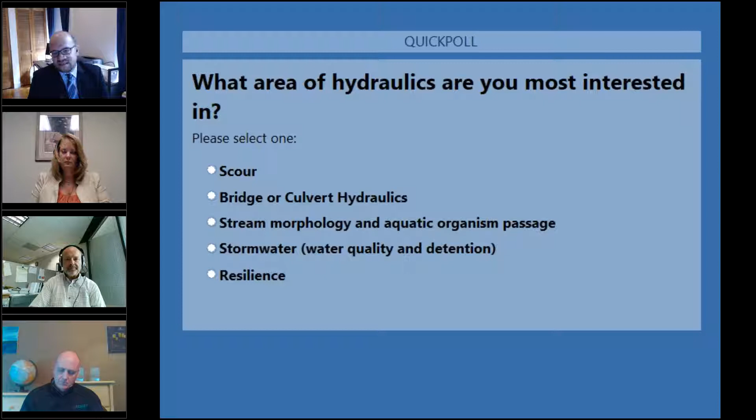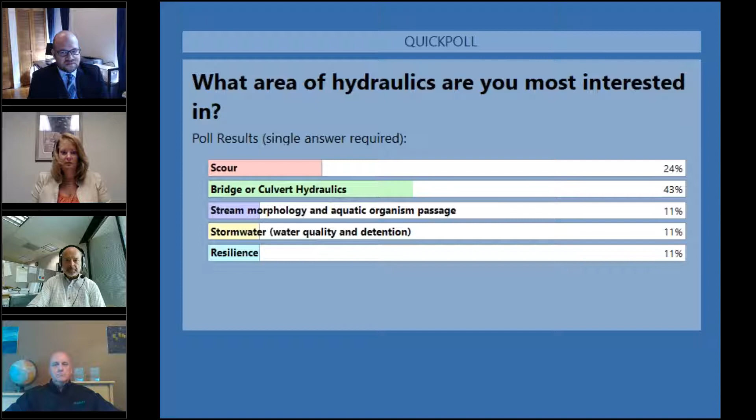Results. Wow, lots of bridge and culvert hydraulics. Yep, 24% scour and then 11% for all the other categories. Okay, I'm going to hide that poll question.

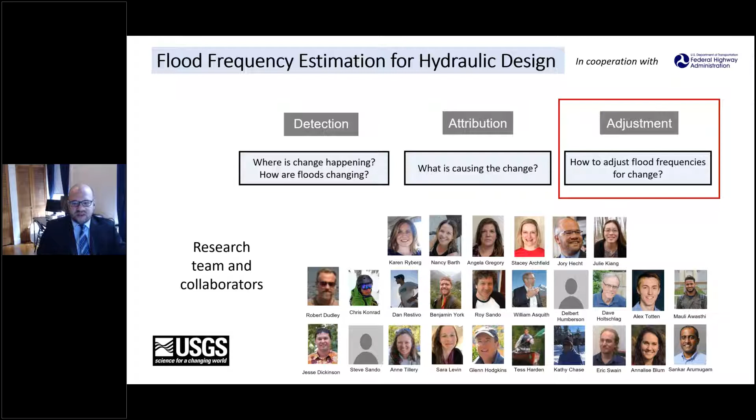So I'd just like to start with a brief overview of my presentation today. First, I'm going to review some more common approaches for adjusting design peak flows, such as the 100-year flood, for changing environmental conditions. Next, I'm going to use a case study in suburban Detroit to illustrate the importance of accounting for changes in peak flow variability. After that, I'm going to show how accounting for environmental changes can get a bit messy when it comes to selecting a design flood estimate that takes environmental changes into account.

Now, while urbanization can indeed induce many different changes to peak flows through a multitude of mechanisms, here we're going to focus on the better known tendency for increases in impervious cover to increase peak flows. And then finally, I will conclude with a brief discussion of how these methods can be extended with some extra steps and cautions to make climate-based adjustments for those who are interested in incorporating any climatic changes into their estimates.

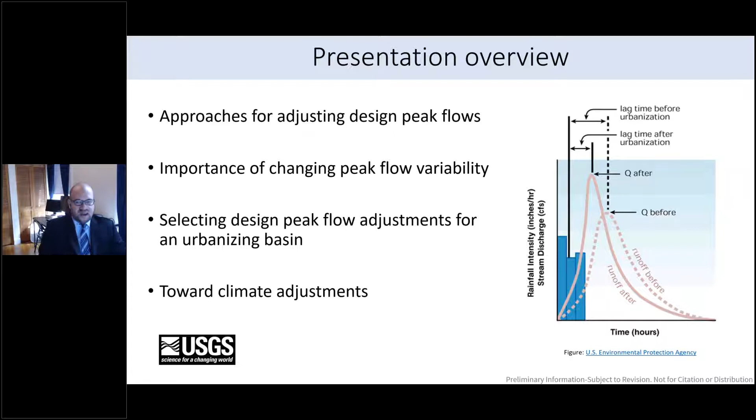So let's get into some existing practices for addressing changes in design floods. So one approach that's sometimes used is simply a safety factor. For instance, this might be requiring a certain freeboard height for a structure above the 100-year flood elevation. Another common practice is to adjust previously computed design floods using updated hydrometeorological data. This may include using the most recent USGS flow data or using updated extreme precipitation estimates from NOAA's Atlas 14 in a design storm simulation, or it might even include removing data from an unrepresentative period.

So if you, say, have a dam that was built in 1960, it might not be worth including the data prior to 1960. Another approach is to simulate the effects of different historical or design storms on a watershed under current land use conditions. In addition, there are numerous, actually quite a few, statistical procedures for adjusting design events using trend modeling.

More recently, the National Cooperative Highway Research Program commissioned a report that looked at a whole bunch of different methods from the literature and recommended using just trends in the mean annual flood. Now, one important thing to bear in mind about such an approach is that it assumes that small annual peak flows are increasing at the same rate as large ones.

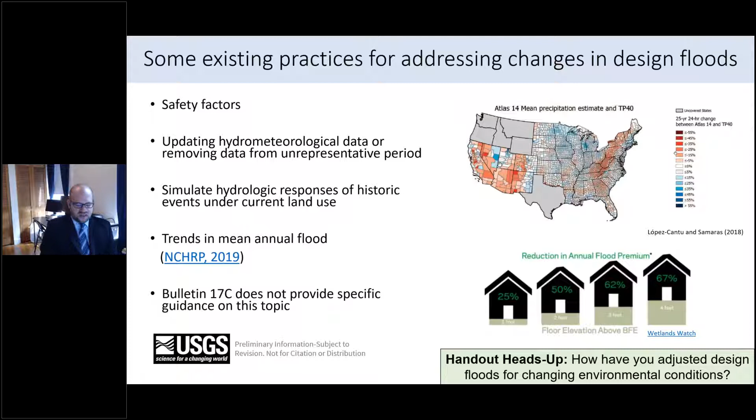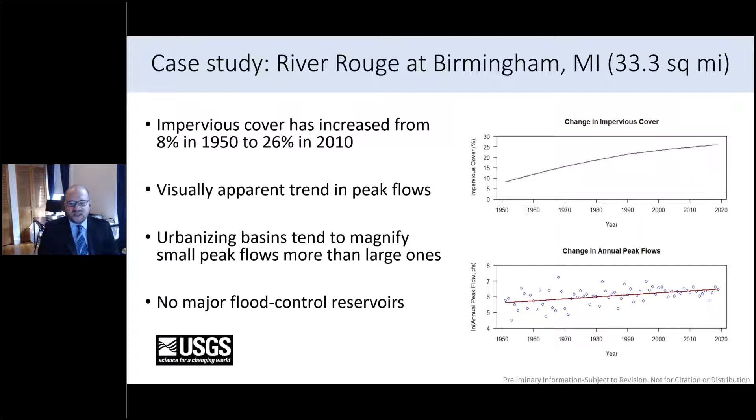So one thing that we sought to do is directly use this impervious cover information in a trend model instead of using time as a surrogate for it. So how can we go about doing this? Well, we can apply the same natural log transformation that you saw on the previous slide, but instead of using time as our independent variable, we use the impervious cover, which we've denoted here as IC, as an independent variable. And we get a similar result.

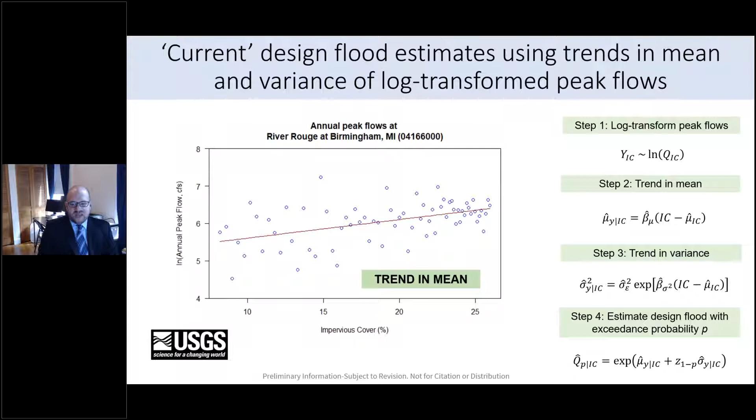One slight difference that you might see is that the points representing the latter part of the record are closer together because, as we saw on the previous slide, the urban growth rate has slowed down considerably in recent decades. However, one of the key features, the reduction in peak flow variability over time, remains when we look at the basin's response to changes in impervious cover. You can see that the distance between the red trend line and the blue observations becomes smaller as the watershed becomes more urbanized.

So to model the trend in variance, we can square the model residuals and see whether or not they are also related to the impervious cover. They are. So we can also model the change in variance as a function of impervious cover. Then we add the estimates of the mean and variance conditional upon a given value of impervious cover, say the impervious cover in our most recent year of record, into the quantile function.

So we take the mean of the log-transformed flows conditional upon the impervious cover and the variance of the transformed flows conditional upon current impervious cover, and we plug them into a quantile function that allows us to estimate the design flood with an exceedance probability P. So if we're looking at a 100-year flood, the exceedance probability will be 0.01. And this is how we can incorporate changes in impervious cover into design flood estimates.

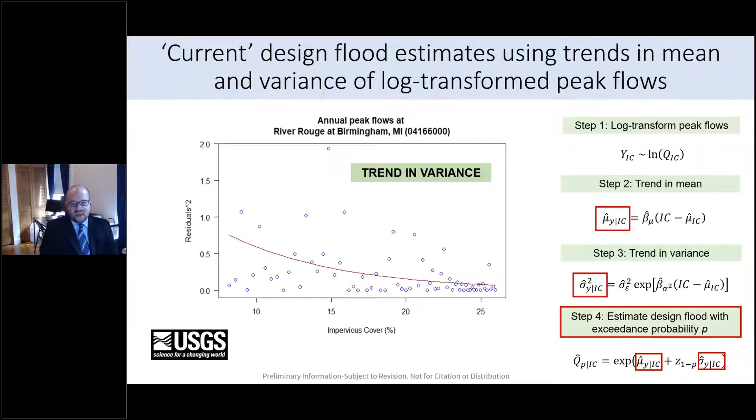So, however, we're not going to assume that models that look at trends in the mean and variance are always better, because any time you add more complexity to a model, you also increase the uncertainty. So I'm going to show you how we went about comparing 4 of the different trend models that we're examining in this study for our site in suburban Detroit.

So first, we're considering a no trend baseline case. Then we're considering a case when there's only a trend in the mean of the log transform flows. Then third, we're considering a case where there's a trend in both the mean and the variance. And then finally, in addition to looking at changes in the mean and variance, we're just going to go right to the percentile that we care about, which is the 100-year flood, or the 99th percentile of annual peak flows.

And you can do this with a method called quantile regression, which doesn't even depend on selecting a probability distribution. And one thing that's nice about it is that it can recognize that different floods with different recurrence intervals change at different rates. So here you see a little conceptual diagram. The 2-year flood increases pretty rapidly, the 10-year flood a little less rapidly, and the 100-year flood barely increases at all. So we wanted to compare this method to more traditional approaches that involve probability distributions.

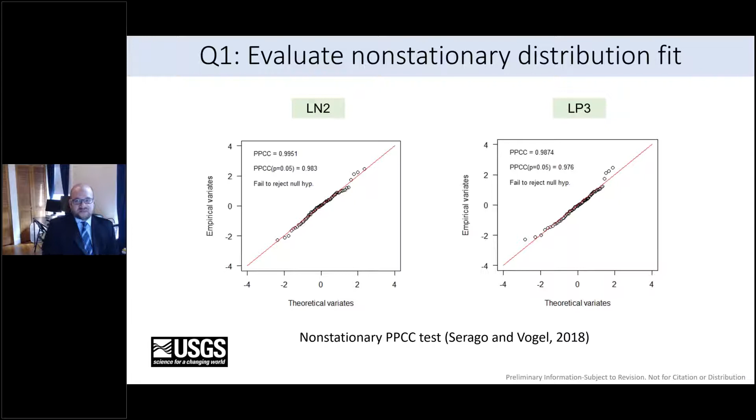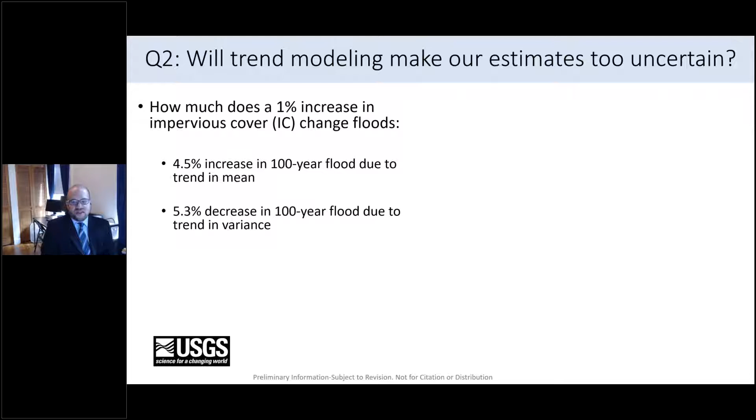So now moving on to our second question, will trend modeling make our estimates too uncertain? Or when is it worth dealing with the extra complexity of trend modeling? So to answer our second question, we first need to compute the trends in the mean and variance. Our models of the trends in the mean and variance show that for each 1% increase in impervious cover, there is a 4.5% increase in the 100-year flood due to the trend in the mean, and a 5.3% decrease in the 100-year flood due to the trend in the variance.

And then we can run Monte Carlo simulation experiments to see whether it's better to use a model with higher bias and lower uncertainty. So that would be a case where you just assume no change and you might have more bias, but you're going to have less uncertainty because you have fewer parameters. Or a model with lower bias and higher uncertainty. And we would do this for data arising from an assumed probability distribution.

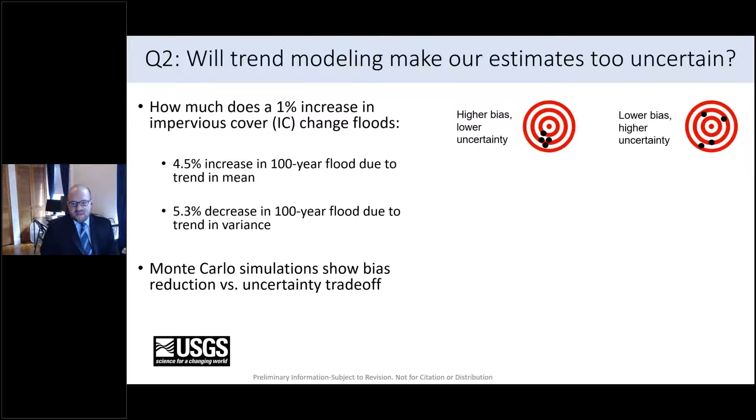And then to determine whether to use an estimator that has higher bias and lower uncertainty, or lower bias and higher uncertainty, we use the fractional root mean squared error metric, which accounts for both bias and uncertainty. And we run these experiments for many different combinations of trends.

So we look at trends in the mean and trends in the variance, and look at a whole bunch of different combinations, which you see there with the black dots. And we see for each combination which of these four models performs the best, or in other words, has the lowest fractional root mean squared error.

So let's start with a simple example. If we have no trend in the mean and no trend in the variance, not surprisingly, the simulations tell us that it's better to use the model with no trends, because otherwise we're just going to add uncertainty without really reducing the bias much.

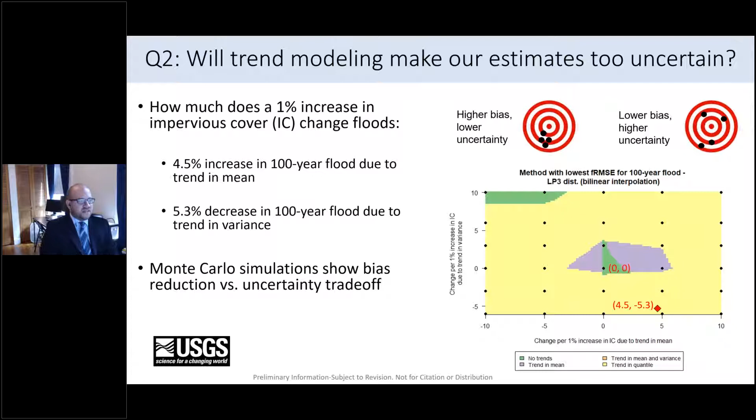So this provides us with important information about how well these different methods might perform under different distributional assumptions, but it's not the only line of evidence that we're going to use to make the final judgment. So now let's look at the actual 100-year flood estimates. These 100-year flood estimates are conditioned on the watershed's current impervious cover, approximately 26%.

Again, modeling just a trend in the mean assumes that the variability of the annual peak flows is the same over the entire period of record. Clearly, this is not the case. Moreover, the 100-year flood estimate accounting for just the trend in the mean, as you see in the purple bar on the bar plot, is way above the flood of record. And this is a 69-year record for your reference.

As you can see in the graph on the left, there isn't any strong visual evidence that the largest floods are increasing. For this reason, we discard the trend in the mean as an option under both the LN2 and LP3 distributional assumptions.

Next, let's look at quantile regression. Again, this is an empirical method that we're comparing to distribution-based fits, and therefore yields the exact same result in both the LN2 and LP3 graphs. So it's the exact same in both bar plots. However, it is substantially below the flood of record on both graphs.

Now, while the flood of record in theory can have a recurrence interval above 100 years, there is another important issue with quantile regression. The largest flood took place earlier on in the urbanization process. So as a result, the quantile regression model estimates a decrease in the 100-year flood. For this reason, we eliminated quantile regression from further consideration.

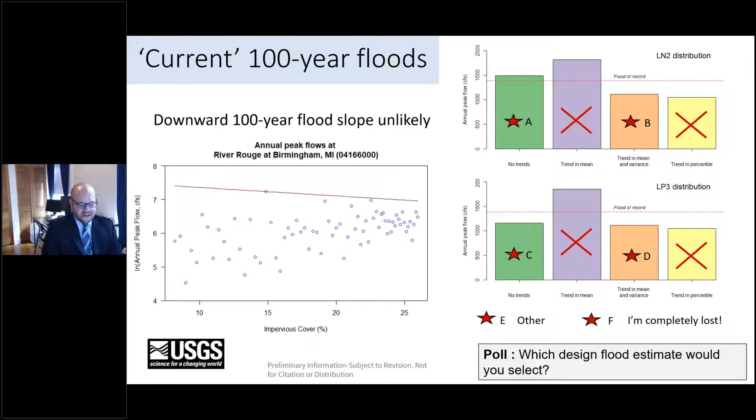Okay. So now moving on, some of you might have been wondering if it's possible to apply the same method using climate covariates such as annual precipitation or seasonal temperatures instead of using urbanization indicators such as impervious cover. And the short answer is that yes, you can extend this approach to accommodate climatic variables, but you need to be very careful.

First, you need to make a judgment as to whether the trajectory of change is going to continue, level off, or switch directions over the course of the design life of your infrastructure. This can get tricky with climatic data since apparent trends may be really short-term changes in longer-term cycles. It's best to use design floods updated for current conditions to design infrastructure for a lifetime over which subsequent changes are unlikely, or else you would have to make this even more complicated.

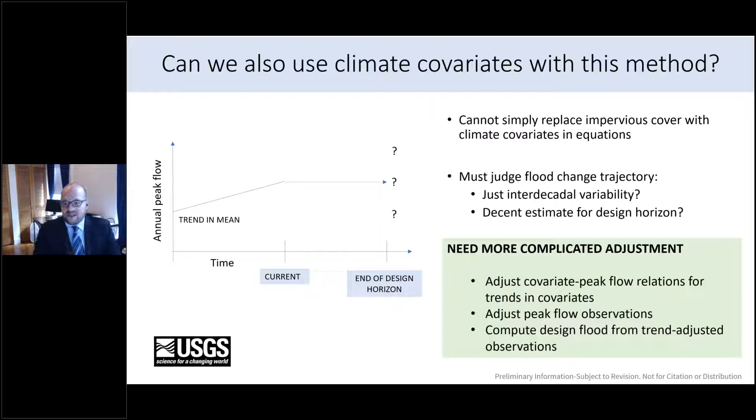So don't go home and try what I showed you with urbanization adjustments on climate adjustments just yet, but we will have a paper or report that will publish this work. So to sum things up, I'd just like to add a few concluding remarks.

First, methods that account for changes are essential for design peak flows. Second, changes in peak flow variability can affect design flood substantially, especially in urbanizing basins. My prior dissertation research shows this effect in numerous other basins across the country. So if you're wondering whether the River Rouge case study is a special case, you're not going to see it everywhere, but there are quite a few other basins in which we see this effect.

However, urban basins can also be quite idiosyncratic since there are so many other things going on in addition to impervious cover. And what I'd like to look at in future work is the effects that stormwater infrastructure construction may have on the reduction of peak flows.

Third, it's also possible to make changes for climate adjustments, but these are more difficult and complicated. For instance, you need to consider whether apparent trends have sustained change signals, and if so, make adjustments for temporal trends in your climate covariates. And if I wasn't clear before, climate covariates are the independent variables that you use in the regression models to adjust design peak flows. And I'm happy to answer more questions about this or talk to anyone who's interested in the topic more offline.

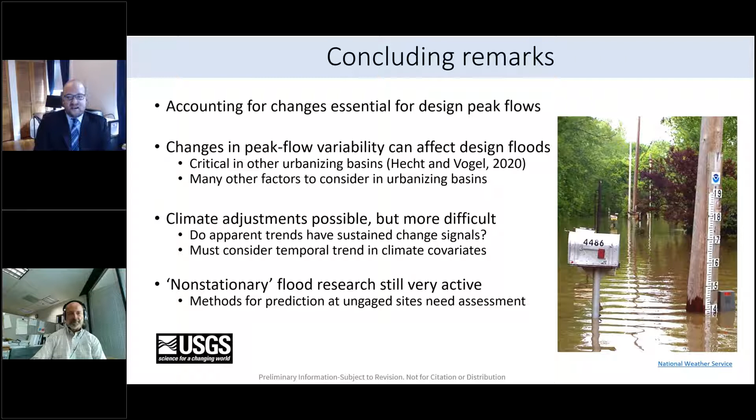However, our immediate next step will take a bigger picture view of changes in flooding and their impacts on infrastructure. As many of you indicated in the initial poll, there's a strong interest in bridge scour in the transportation community. And with that information, I'd like to make a shameless plug and say that we'll be investigating additional streamflow metrics and hydrologic forcing factors to help the Federal Highways Administration understand channel change and bridge scour.

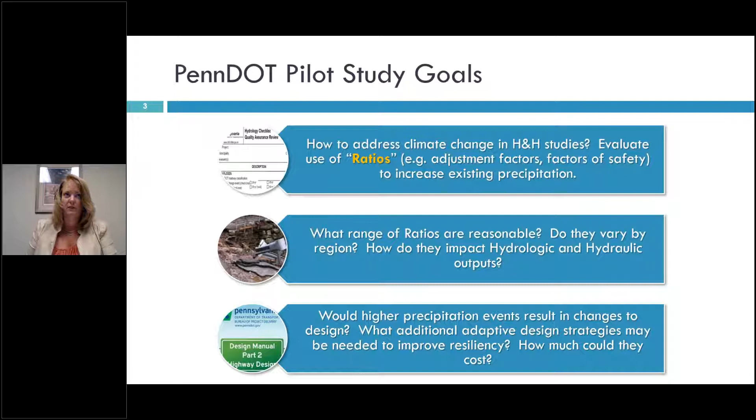Pennsylvania has a lot of varying topography and climate across the state, and that's why we looked at 3 different parts of the state for this study. And then would the higher precipitation events result in changes to the design? What adaptive design strategies might we want to consider to improve resiliency, and how much would they cost? Given that it's 20 minutes, I'm not going to get into a lot on the cost considerations. We do have a pretty in-depth report that was developed for Federal Highway that does get into some of those details too.

For the 3 sites that we looked at, we used the Watershed Modeling System, WMS, to develop the basin characteristics, and then the peak flows for the existing and future hydrologic conditions were developed using HEC-HMS. And we considered future land use in the watersheds where that was applicable or where there was anticipated future land use.

I can hear a lot of background talking. Is that? I can too, but it looks like it's coming from, is that not going on in your area? No, there's nobody in my office but me physically. Well, that's interesting. Hopefully it's going to calm down here. I'll keep checking the system to see if I can figure out where it's coming from. Okay, I didn't know. I was like, no, I'm the only one here.

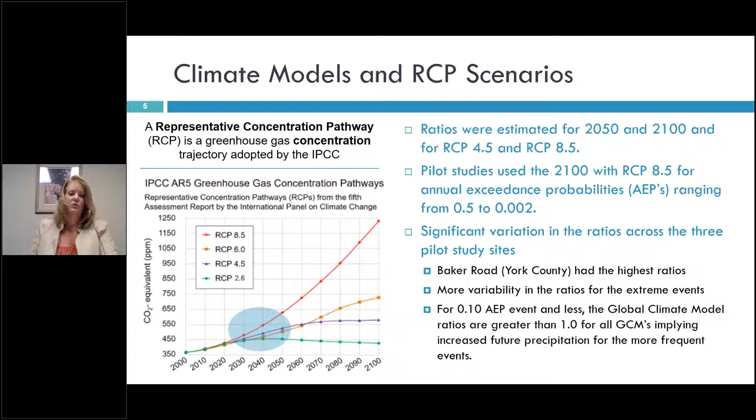For the 0.1 annual exceedance probability event and less, the global climate model ratios are greater than 1 for all of the GCMs that we looked at, which implied increased future precipitation for the more frequent events. As we looked at some of the greater annual exceedance probability events, we did see some of the global climate models dip below 1, indicating decreases, which showed some of the larger inconsistencies in some of those larger events.

which had varying ratios, and some that for the higher annual exceedance probabilities went below 1, but much more consistent. For Delaware County, our range was 1 to 1.76. For Allegheny, our range was 1 to 1.51. For York County, our range was less than 1 to 4.5. So a lot of variability in that data, indicating some of the uncertainty in the global modeling process, particularly as we look at those higher annual exceedance probabilities for those larger events.

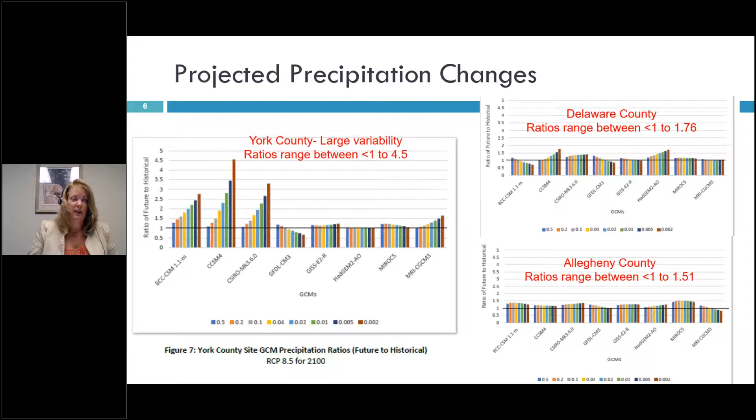So based on that and some recommendations in the NCHRP 15-61 study, which recommends considering using the 0.1 AEP ratio for the more extreme events because of the current inability of the high resolution data sets to represent the precipitation extremes, we decided to use the 0.1 AEP for all 3 sites. And for simplicity of the modeling, we also applied the 0.1 AEP ratio to the 0.5 and the 0.2 AEP events, so that we were consistently using the same ratio for all of the events. And there was not a huge difference in those 2 lower events anyways.

So what we ended up getting is for the Allegheny site, a ratio of 1.24, which in essence is a 24% increase for year 2100 with the RCP of 8.5. Delaware County was our lowest at 1.16, and York County with this 0.1 AEP was down to 1.25. If we had used York County with some of the higher events, you can see in the bright yellow in this figure how much higher that ratio would have been for some of those other return periods, closer to 2 for the 0.002 AEP. So these are the values that we used for our precipitation ratios for our future conditions.

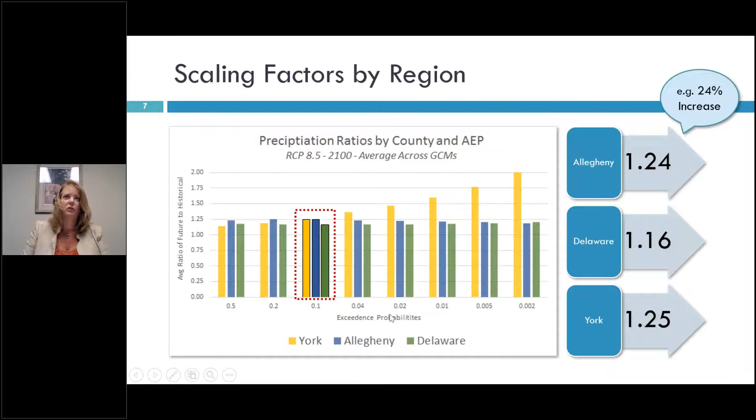So now I want to move into discussing initially the H&H results for the 3 pilot studies, some of the information about the studies, and then we'll get into the applications within PennDOT's design process and possible adaptation strategies later in the presentation. So our first site is SR 2046 along Streets Run in Allegheny County. This is the one in western Pennsylvania near Pittsburgh.

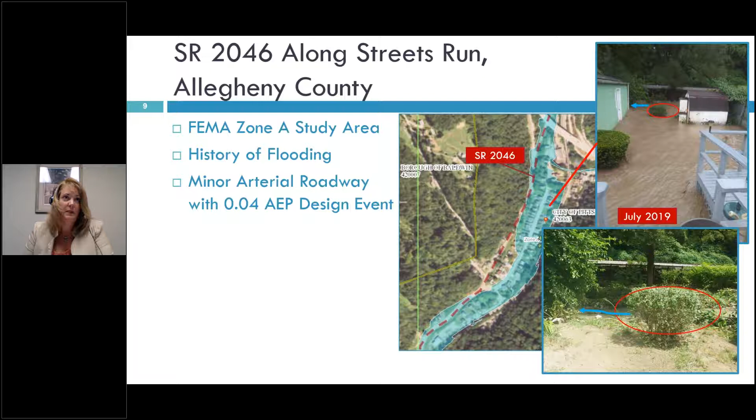This was just July 2019. This actually was probably about a week and a half prior to our site visit to this area, so we were able to get some pretty nice photos from locals. If this road was designed today under PennDOT's current criteria, it would be designed as a minor arterial roadway with a 0.04 AEP design event.

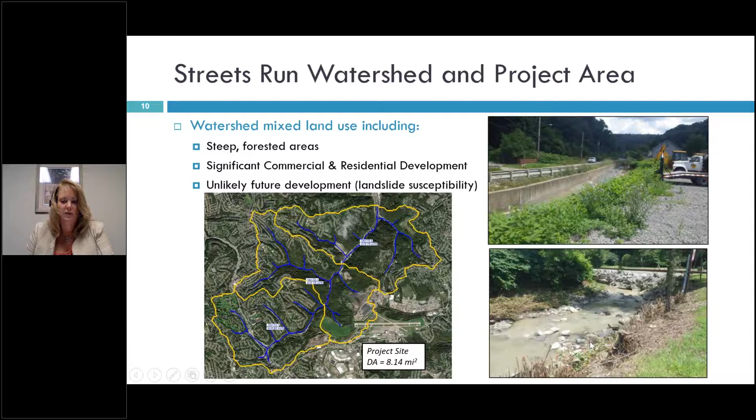So for instance, for the design event or the 0.04 AEP, if we were to design this road today, we were looking at flow increases of 1,400 CFS for the 0.04 AEP and over 2,550 CFS for the 0.01 AEP. So for a 24% increase in precipitation, we're showing approximately a 40% increase in flows for the 0.04 AEP and greater than 50% increase in flows for the 0.01 AEP.

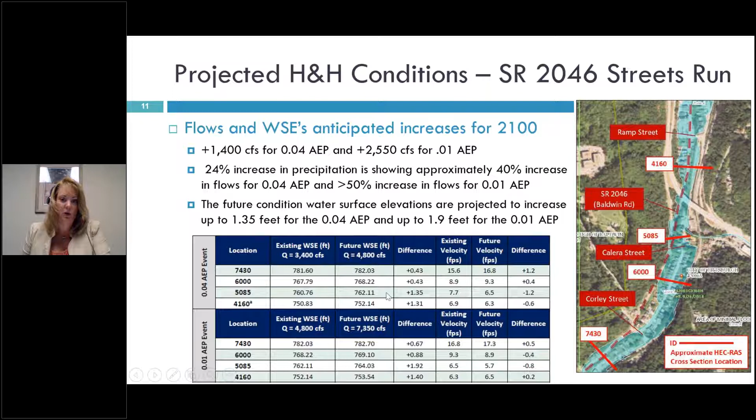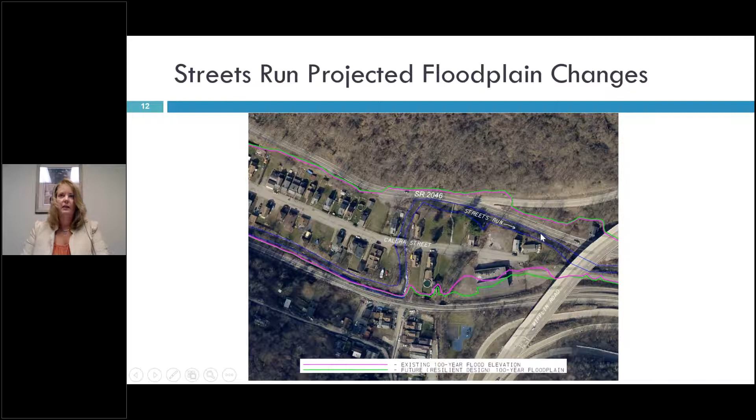in this area. So the purple line is showing the existing 100-year or 0.01 AEP, and the green is showing the projected future condition. And although it doesn't look like extensive increased floodplain width in this particular area, what we are going to see is that the lower event storms are going to be over more frequently, particularly in this section here where Streets Run is directly adjacent to SR 2046. We're going to see the flow overtopping the road much more frequently.

As we move on to the next site, the Baker Road over Little Conewago Creek is in York County, and it was actually York County Bridge number 177. This site was selected because of the history of roadway overtopping at the site, and the site was currently under design for replacement. So if there were some resilient design strategies that might be beneficial to consider in the replacement, it was a good site from that standpoint.

The watershed is a mixed use. In this particular watershed, we have agricultural, commercial, and residential development, industrial use. There are a couple quarries within the watershed. And additionally, there was carbonate area under this watershed, which made this site a little different, and we'll talk about that on the next slide. And then for future conditions, this particular watershed did have an area that was zoned for some potential future development. And so we did consider that also in the land changes for future development, in addition to the precipitation changes.

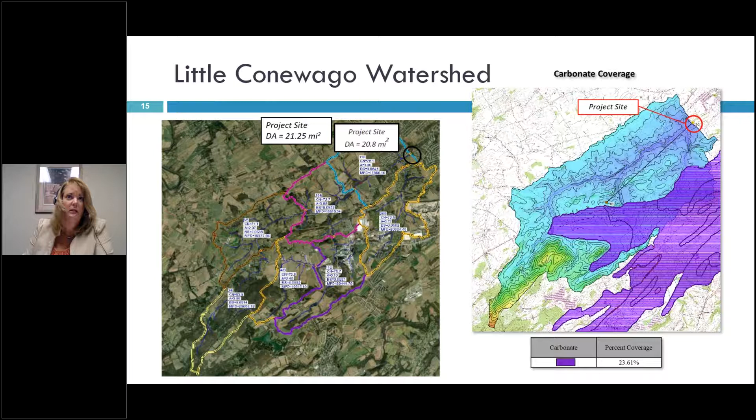The two figures we're showing here, the one on the left shows the 20 square mile watershed, and the one on the right is the one I want to focus a little bit on. The dark purple shading is representing the carbonate geology that underlays the site, and it actually accounts for a little less than 24% of the watershed. So we did consider that in using some reduction factors to the flows used in the HMS modeling to consider that carbonate as we looked at this site.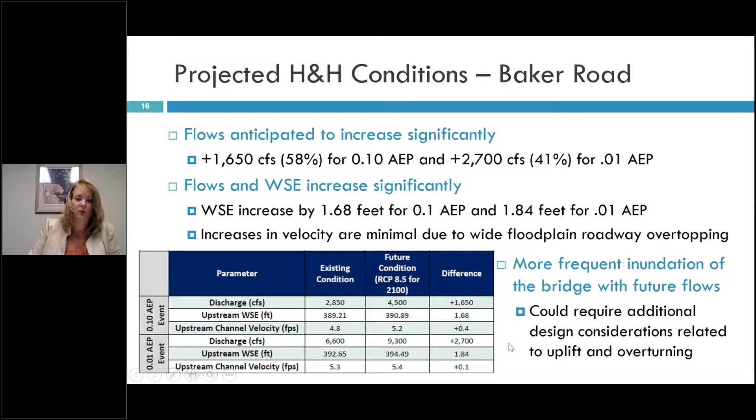This is showing the Baker Road projected floodplain. The existing floodplain, 100-year or 0.01 floodplain, is shown in yellow. And in green, we can see the proposed or future potential floodplain.

And what is interesting here, as we looked at various ratios, this floodplain in the green lines here along the left north side of the picture really show that future conditions could show increased impacts to this housing development immediately local to the bridge without any changes to the actual bridge, just from future predicted flows.

We also, and I didn't get into showing this in these slides just from the period of time, but we also looked at velocity distributions for the flow. A lot of the flow occurs in this left overbank. Flow is moving from the bottom of the picture to the top of the picture, so this left overbank.

And we looked at would increased velocity distributions across there, and more frequent overtopping, make that embankment more susceptible to erosion, and could there be some things there to consider? So those are some things that would be looked at in resilient or adaptive strategies.

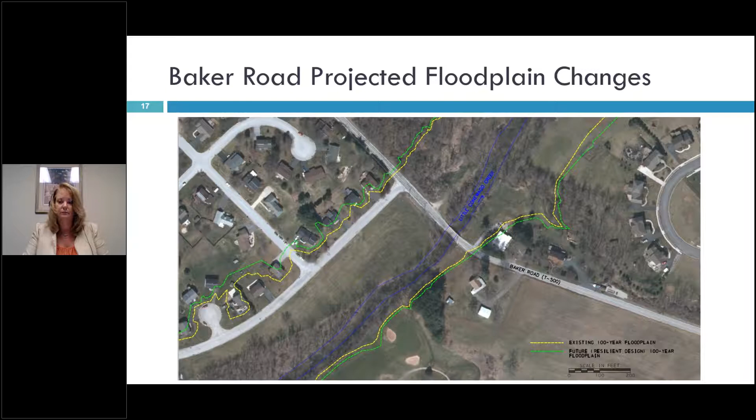As we move to the last site, the study is Delaware County Bridge along T314, or locally known as Station Road, and it's over East Branch Chester Creek. This site was selected also because of a history of overtopping and a potential future replacement. You can see the current existing bridge in the picture on the top of the screen, and then the floodplain is presented in the bottom of the screen.

The watershed is a mixed land use watershed with agricultural, commercial, and residential. A large portion of the Brandywine Airport is in the watershed, so that's an urbanized section. There were no large land use changes anticipated. The watershed is fairly developed in a good part of it, and where it is agricultural in some of the undeveloped areas, some of those have requirements to stay in those zones.

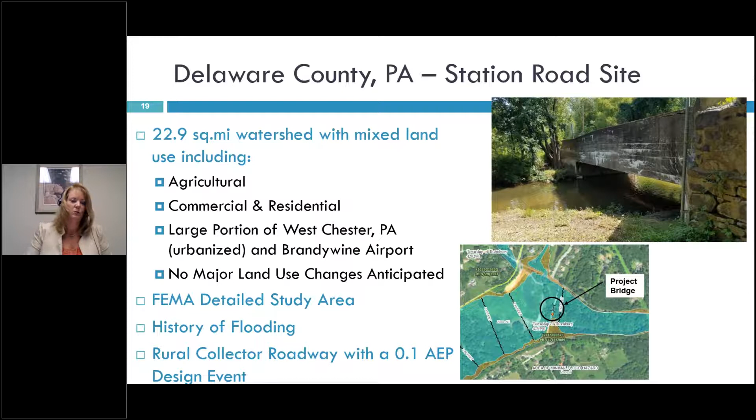So it was also a FEMA detailed study area, and per PennDOT's current classifications would be a rural collector roadway with a 0.1 AEP design event. Again, the flows that we're seeing increasing here show a 2,200 CFS increase for the 0.1 AEP, which is a 56% increase over existing, and a 4,400 CFS increase, or a 45% increase for the 0.01 AEP.

And the water surfaces were increasing significantly, by about 1 foot for both the 0.1 and the 0.01 AEP. The increases in velocity, again, are not drastically increasing, due to this wide floodplain and roadway overtopping. And again, this one would be another one where some of the additional bridge design criteria for overturning and uplift might need to be considered.

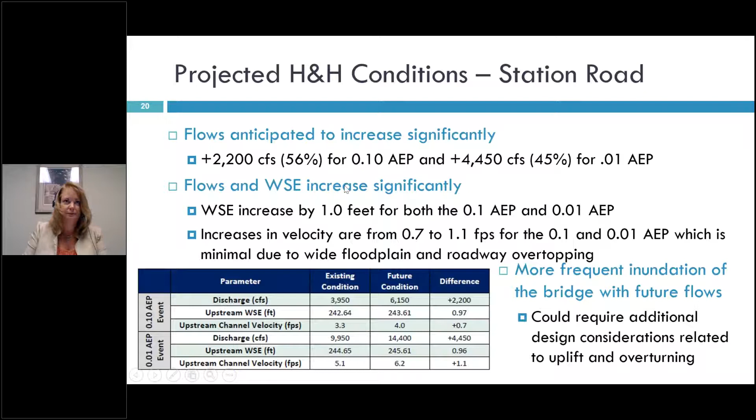The thing that was interesting about this site is really the watershed. So the flow for this site is moving from the left side of the screen and meandering through this floodplain to the right. Our bridge is in this area. And the existing condition is this light blue shaded area, which did not overtop the roadway through here in the existing for the 100-year floodplain.

As we look at, and I'm going to zoom in here, as we look at this area for the future predicted flows, now this section of the roadway right here is showing that it's going to be inundated and really restrict the traffic that would have previously been able to move through this area. So that's something that would have to be looked at in the sensitivity to, is there benefit in possibly raising this side road?

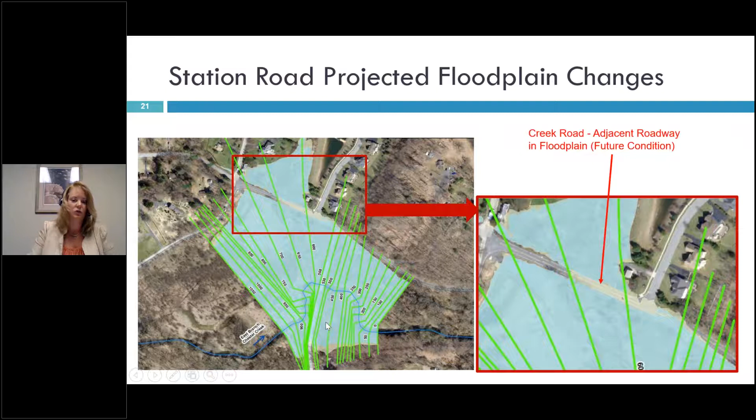Our study road is actually over here. So this is an adjacent roadway that may need to be looked at as future flows from the overall stream are flooding out to that area.

So that's a summary of the various 3 sites that we looked at, and sort of just the general hydrology and hydraulic results for those future conditions. Now we want to look a little bit on how we evaluated the 3 study sites for PennDOT design processes, and also some of the adaptation strategies that we were considering.

In specific, the current research has aimed to address some of these questions. How should those precipitation ratios be applied within the H&H process? What future precipitation ratios are appropriate for application? We looked at 3 different sites across the state. We may need to look at more. We have some regional variance within that.

What hydraulic parameters should be evaluated under existing and future precipitation scenarios to identify resilient design options? And what resilient design options should be considered?

Although more research and evaluation is needed before we can look at finalizing some of these climate prediction methods or formally integrating them into design manuals and processes, we did develop several checklists and resiliency considerations that we will discuss on the next few slides that may be closer to implementation in the PennDOT process.

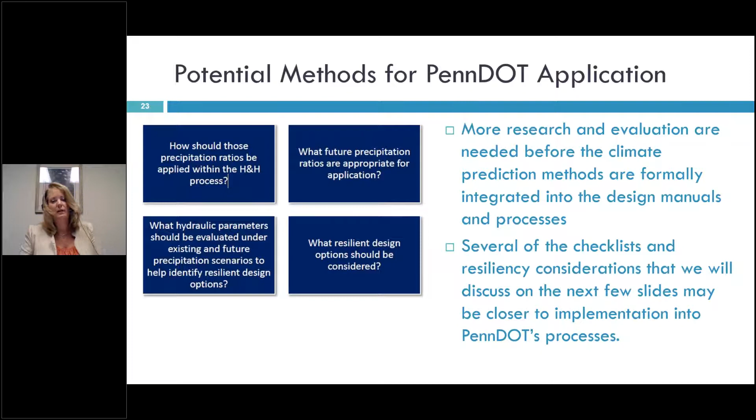In particular, we developed 2 resilient design checklists to assist in the evaluation of the need for various resilient design options, a bridge project checklist, and also a roadway parallel to streams checklist. These checklists were developed considering interdisciplinary concerns more so than just the hydraulics, and we will show you some of the different things that were looked at.

Because every site is different, establishing ranges or thresholds for checklist parameters is not practical. When determining the level of potential for resilient design, engineering judgment, the interdisciplinary coordination, and knowledge of the existing conditions at the site are really important to evaluate, related to risk posed to the physical infrastructure and the traveling public, a comparison of the existing and future parameters, and even magnitudes of those future parameters and their effect on the performance.

As we looked at these checklists, and we're going to show you one on the next slide, we struggled with picking those specific ranges. So instead, we looked at this low, medium, and high to try and envelope things. Things that we thought were minor or maybe not necessarily worth special designs for resiliency, we classified as low. Things that may be more sensitive to resiliency designs and may be worth looking into in more detail, we classified as medium. And things where we thought resiliency design modifications would be highly recommended, we classified as high.

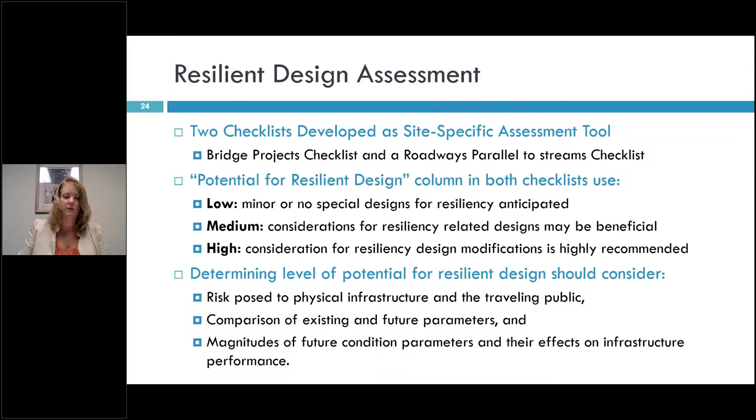This is our attempt to look at this. We had coordinated with PennDOT on reviewing our draft checklists, and they had suggested some updates, and we had also coordinated with Federal Highways. Eric Brown had looked at them and several others and made some suggestions too.

So this first checklist is the bridge checklist. It consists of interdisciplinary parameters, including hydraulics and safety, that are compared between existing conditions and future conditions. For instance, we have site data in the top of the checklist, summarizing some things too, what methods were used, if there's embankment instability or overtopping frequency.

And then one of the things that becomes important as we think about risk is this provide access to critical services. Are there detours available? What's going on at this site? Because that might make other things more important for a particular site compared to if there is a lot of availability and this isn't a high parameter.

This particular site we're looking at is the York County site. If we look at these red boxes highlighted here, we have parameters for the design event and also parameters for the 0.01 AEP event. And you can see in the highlighted boxes, the more concerning items for this site are related to the overtopping velocities and depths. One of the structural concerns is considering uplift and overturning as we look at having more depth over the roadway and actually over the bridge deck.

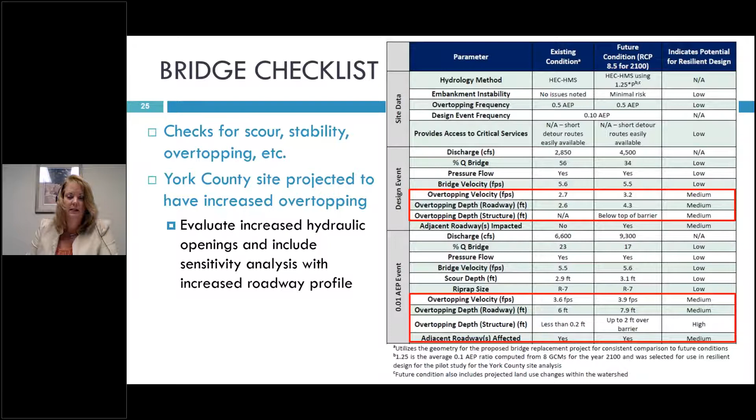A lot of times in Pennsylvania, we have flooding over our approach roads, but our bridge decks are not fully inundated. But in this particular situation, in this bottom red box, in the existing condition we have less than 0.2 feet over the structure, whereas in the future condition, we could have up to 2 feet over the bridge barrier. And that will significantly impact some of those other forces on the bridge.

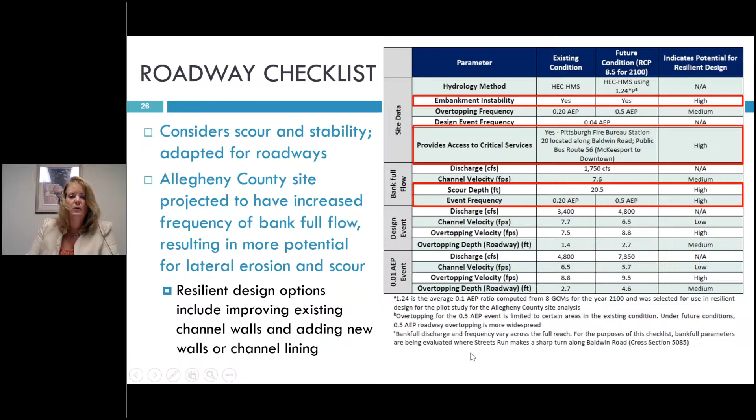So as we move on, we'll look at some design events or design strategies, and I know we're getting low on time. We looked at evaluating some risk-based approaches for considering strategies for these pilot sites with risk factors which could include potential loss of life, length of the detour if the road is closed, average daily traffic, emergency services, significant erosion if we have more frequent overtopping, and what types of strategies we're going to need to consider: larger hydraulic openings, bridge design changes, pavement materials, scour prevention strategies, inspection and maintenance procedures. These are all things that were considered.

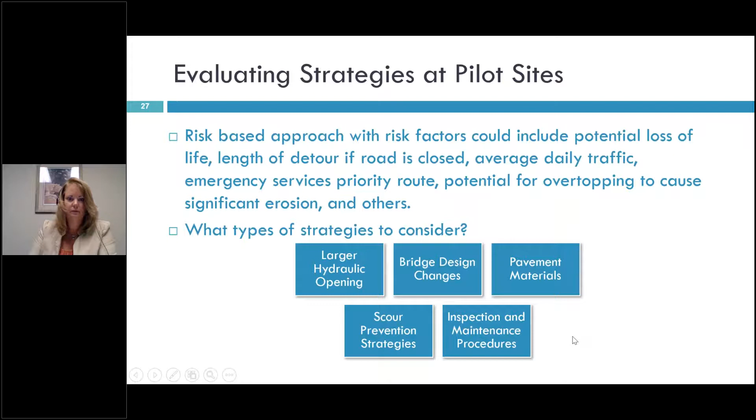Some of the adaptation considerations for the pilot study sites, for sites with more frequent inundation of the bridge deck. One of the things that came out of this that I honestly, as a hydraulic engineer, wasn't thinking about initially was related to some of the resilient design of the bridge to address uplift and overturning, including mechanically restraining the bearings, adjustments to dowel bar designs, whether they be longer bars or deformed bars, to help deal with some of those things. We got our structural engineer involved in doing some test cases and some cost benefits that we presented in the actual report.

We looked at increases in the hydraulic opening of the bridge, and in some instances that may be beneficial, but in both of these studies that we had significant roadway overtopping in, there's a very sensitive issue, because as you increase the bridge opening, the roadway profiles go up, and it sort of was a negative benefit as it caused increases in water surface elevation. So in some instances, increased hydraulic opening may be very beneficial, but at two of our particular sites, it was not.

Well, it looks like Donna's having a technical issue there. So hopefully we'll have her reconnected here in just a second.

So hopefully we've got her reconnected. Hi, Donna, are you back with us? Looks like she's logging in here. There we go. We can see your PowerPoint again. Not hearing your audio though. Can you go ahead and go to the audio box and toggle between the phone call option and the computer audio, and hopefully it'll reset your audio connection. It does look like we're going to run over a little bit on time today. Are you there, Donna? I'm still not hearing you. Did you open the audio panel and select the phone call option button? And then toggle back to computer audio. We hear you now. Okay, keep going, thank you.

Thanks. Sorry, I had my power plugged in, but it was not working, so I had a backup in here. Okay, are we still seeing my screen? We're seeing the PowerPoint, but it's not in the full slide view. I think if you just put it back in the, well, there we go. We see the thank you slide. Go back a couple. We were almost done. Okay. So we were on this slide. There we go. Okay, I see it now. Thanks. I'm sorry, I had my power plugged in, but I had to switch to a different cord.

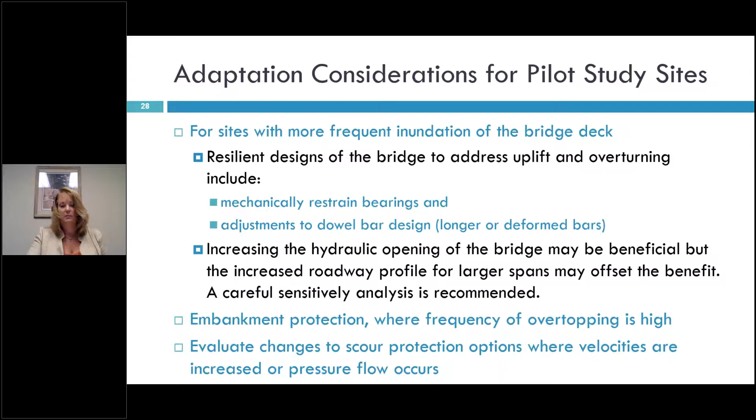So a couple of the other adaptation considerations that we came up with were embankment protection, where the frequency of overtopping is high. Looking at velocity distributions along the embankment may be relevant as we look at areas closer to the bridge. We may need to extend that embankment protection a little further if those areas are going to see higher velocities. And then evaluating changes to scour protection options where velocities are increased, or in situations where we may see pressure flow occurring for future conditions that we didn't see in the existing conditions. And that may change some of our scour design.

For sites with lateral flooding along the roadway that have existing walls, we might need to look at evaluating the level of protection needed at the toe of those existing walls. We may need to consider underpinning the wall with micropiles or replacing scour-prone soil.

An alternate to underpinning would be looking at channel lining. That becomes a sensitive area in some environmental areas. Our Allegheny County area is not particularly a high quality stream, so it wouldn't be as particularly sensitive there as it may be in some other areas with more pristine environmental conditions.

And then replacing the existing guide rail and pavement at the edge of the road with a reinforced concrete moment slab and single face concrete barrier, not to provide necessarily a flood levee protection type of thing, but more so to help prevent the frequent overtopping from damaging the roadway, just keeping it on the stream side. So those are some things that we considered when we had existing walls.

For areas that didn't have existing walls, but we may see a lot more frequent erosive potential, looking at new walls might be something that would need to be considered. So those were some of the various different considerations that we looked at and are documented in the detailed study that we developed for Federal Highway.

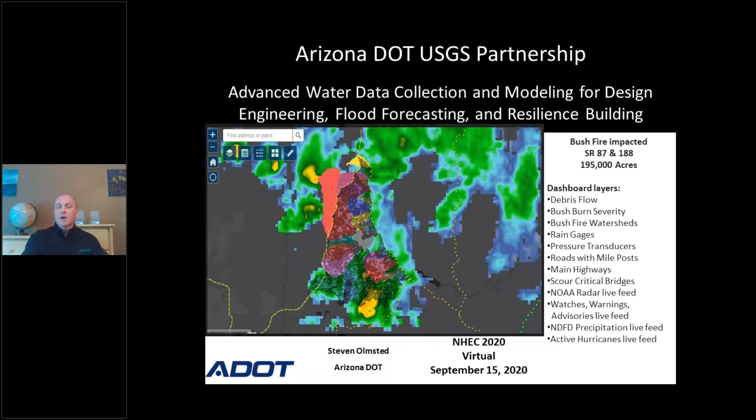And the biggest benefit is the live feed. You'll see it down there in the lower right. And so the districts can look at where a weather cell is happening and see how it's migrating at, near, or over the burn area. The complementary product that was put out, and this is where I'll mention the operations and the hydraulics piece, is USGS delineated 26 watersheds in the 200,000 acres and tied those to the ADOT drainage assets from there.

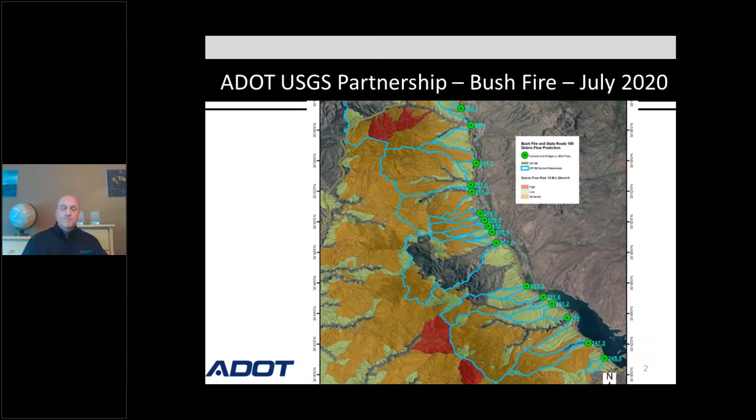So what we ended up with was the development of a pretty comprehensive debris flow risk matrix to help with decision making, prioritization, and our Federal Highways ER application. So let me turn to the partnership now specifically.

Very hard, as Donna pointed out, to get things actually implemented into guidance. So in order for us to really move to a level where the tools that I'll discuss were implementable, adoptable, and also appropriate to consider in H&H and then subsequent overall design, engineering, and project development, we spent a lot of years, all credit goes to USGS, to actually develop a publication.

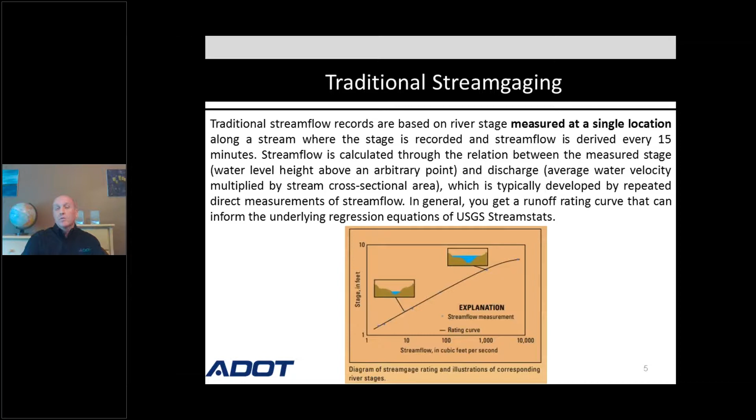But the bottom line that we wanted to improve is that we just felt the traditional stream gauging was not reflecting the topography and the complex geometry that we really find in the Southwest. So again, without going into too much detail, you can read everything in the handout. You'll see the suite of tools. This isn't an all-encompassing list, but it's a large list.

And as you can imagine, it was just improving how topography is captured, how vegetation conditions are captured, how the runoff is captured, and such. The biggest change for us in what we've now moved to in reach scale monitoring is the addition of an array of sensors that are deployed throughout the river reach to remotely and continuously measure river stage and velocity.

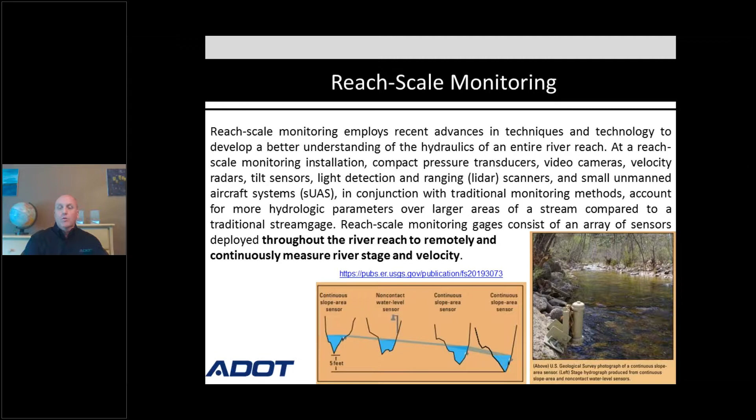And this is especially beneficial in our remote areas where there may not be a traditional gauge available, or we want multiple years of information going into a design and then subsequent construction phase. You'll see here just some of the dynamic improvements in the topics and the type of information we're able to gather, and all these are contributory to H&H.

Okay, I'll run through a pilot example now. So this is in the far northeast corner in Navajo country in Arizona. It's State Route 160, and you can see the severe wash meander. We have something out here that's fairly unique to some of the Southwest states. It repeats itself pretty regularly here in Arizona.

For those of you that have never heard the term oxbow, those are those wash meander activities to your lower left. But you can see at the south end of the bridge the severe scour and erosion that was really pounding into that abutment, and the problems we were really having there.

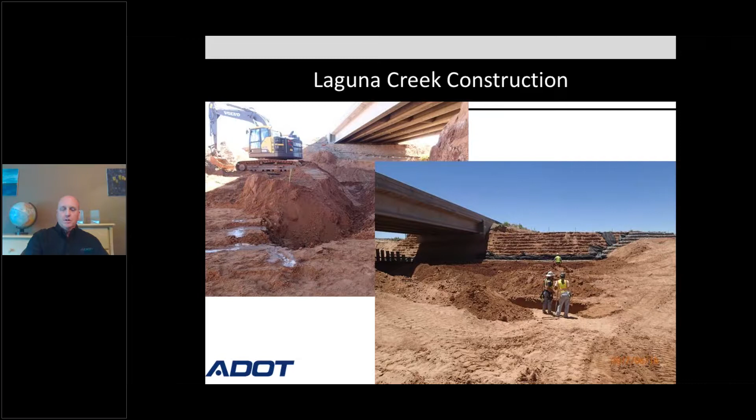The ultimate decision was, we spent about $1.1 million installing gabion baskets to both sides. They're pretty comprehensive. They curl out on both the north and south end of the bridge and both the upstream and downstream side. And so just to talk a little bit about what USGS provided, here's an output of the traditional stream gauging that's available upstream.

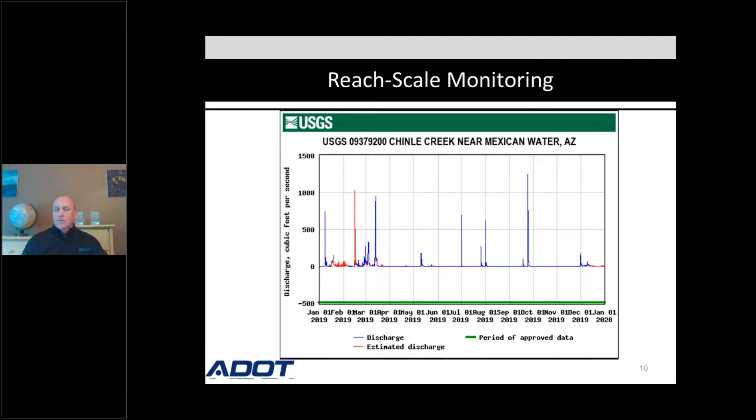What you're looking at is about a dozen low flow 1 to 2 year events. The 2 year, I believe, at this location was about 1,400 CFS. And the real benefit here was taking that traditional stream gauging information that was available from those 12 events and

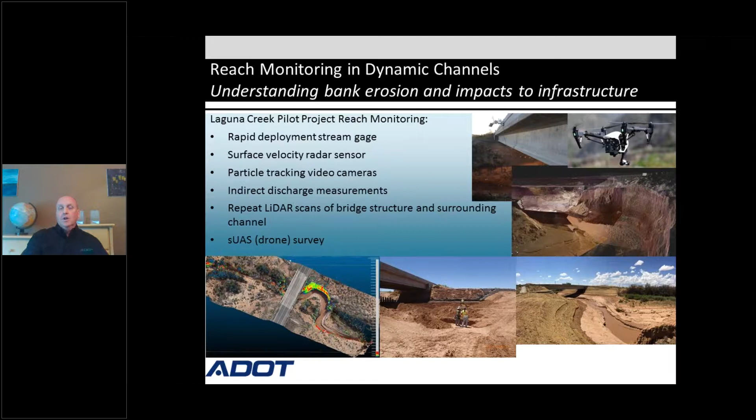really combining it with this innovative suite of tools at the actual structure, and really learning what the outputs were, where there was benefit in better understanding the hydrology, where there were benefits to incorporating inputs into hydraulic design. And this is a location that we've been monitoring for quite a few years.

So what you're looking at here is 3 of those 12 events that I mentioned were overlaid into the point cloud data set to create some erosional change mapping detection, which the design engineering firm used to really validate and have that specific conversation about the exact length and locating of the gabion basket.

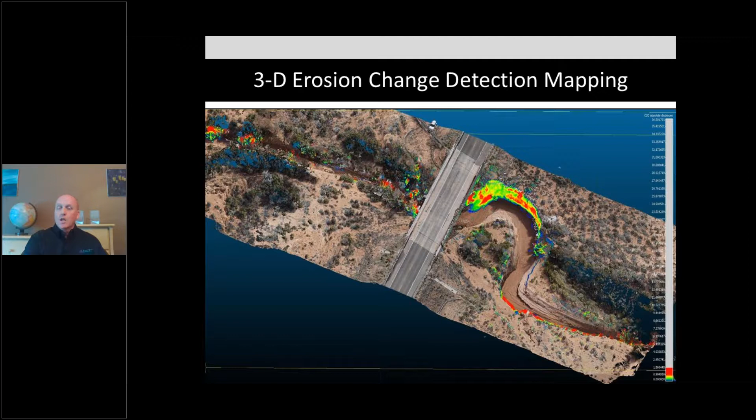So again, it was in its pilot phase. It wasn't a design engineering criteria requirement, but we were able to pilot the experiment. If you want to read a little bit further on it, you can see it here. It was in a TRC in November of 2017.

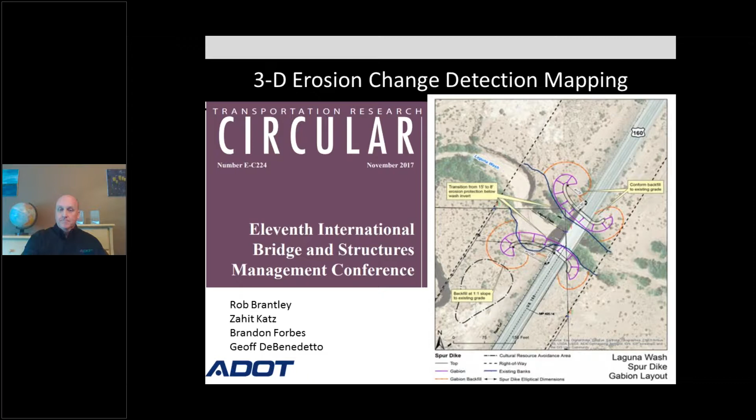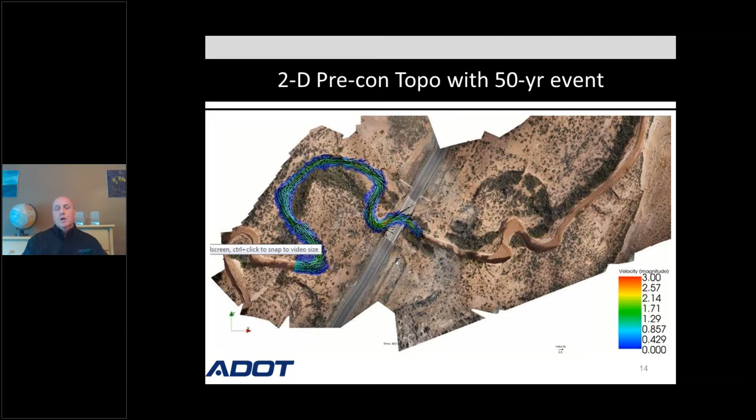So we don't really stop there. What you're looking at here is the animation side of the benefits of all the inputs we were able to gather. You're looking at a screenshot of a proposed 50-year event. Through the pre-construction, what we were able to do, even going into mid-design, was to look at the current conditions. And again, it's just the proposed storm event. We looked at the 50-year, the 100-year, and the 500-year.

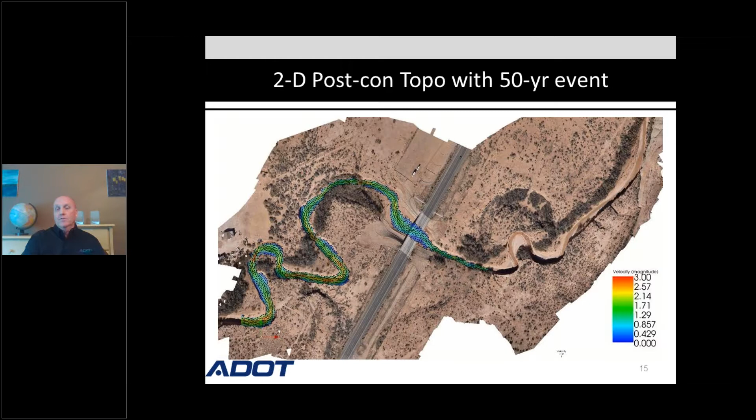So I can't say we moved all the way to a calibrated runoff state, but certainly from a theoretical standpoint, we could tighten up what the 50, the 100, and the 500 year look like. And here you see final grading and seeding.

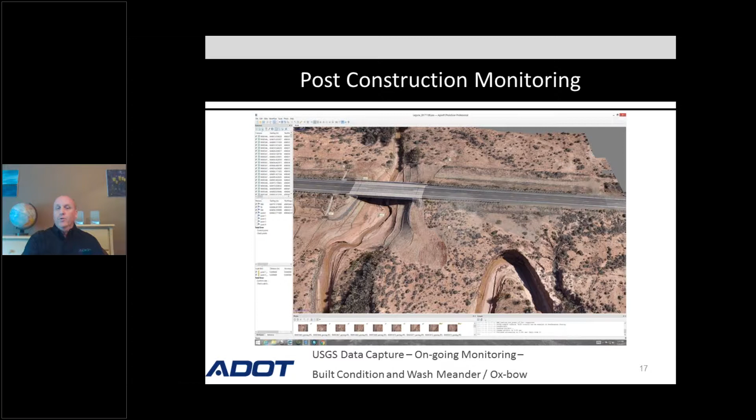So we don't stop there. That activity and construction completed in November of 2017. So for the last 3 years, we've continued to monitor how the structure itself is doing. What are the hydraulics? What's going on with that oxbow? You can see as it progresses toward the roadway. We've continued to advance erosional change mapping.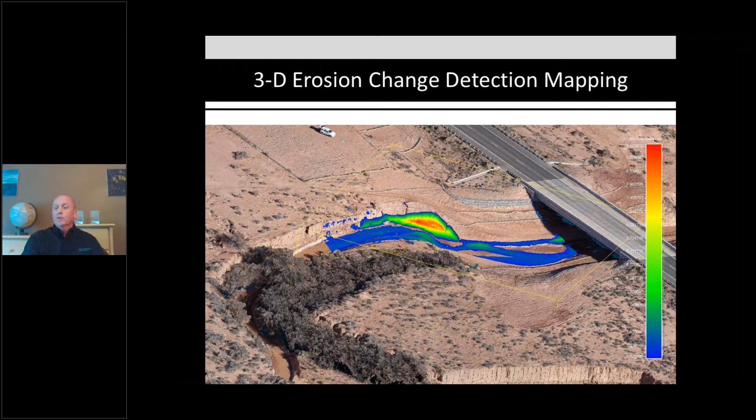You can see the benefits of technology and having continued runoff information. We can really take a look at how the hydraulics and the overall design engineering is holding up, because you can isolate into a specific area.

Okay, so bottom line, fairly common sense. We increase accuracy. I mentioned all the suite of tools and some of the things we're experimenting with. We were able to validate them and get them adopted into ADOT design engineering. My biggest interest, you can see there in red, is to just, even though we're experimenting, we're constantly improving, we're doing proof of concept ideas all the time.

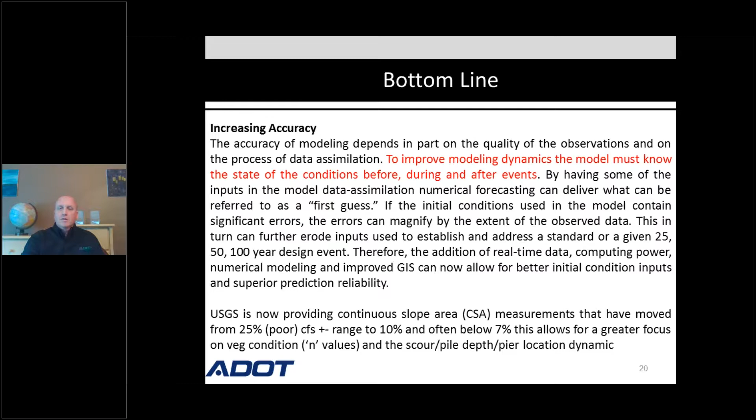It's really just to improve the modeling dynamics and really better understand the conditions before, during, and after, okay? And that after there, you start to see the tie into life cycle planning and asset management. This would be very difficult. The first 4 or 5 years we did this, I had stacks of external hard drives on my desk. You can imagine the size of these data sets, no matter what we're capturing.

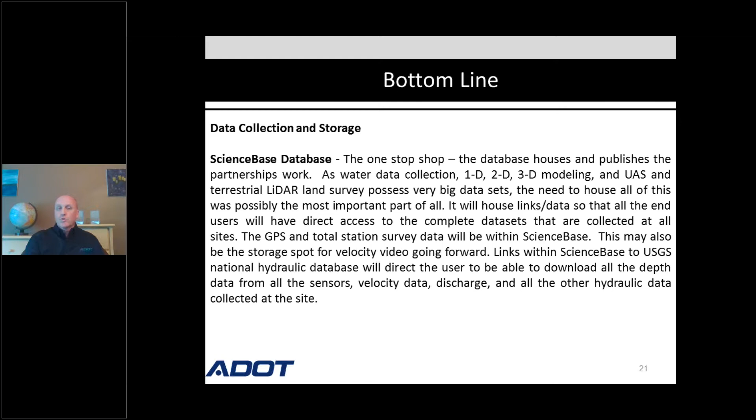USGS built specifically for us a location in their USGS ScienceBase for all this information on every project we do. And the same goes, they built a dedicated Earth Resources Observation and Science (EROS) location that houses the airborne LiDAR, photogrammetric drone, or terrestrial LiDAR data sets as well.

So I'll finish up a little bit more on the linkages. I just really wanted to show how USGS moves from kind of watershed to the enhanced reach modeling, clarifying the vegetative condition, further maybe improving N values, and just that combined with the current topography really created a great suite of inputs to import right into the hydraulic engineering environment.

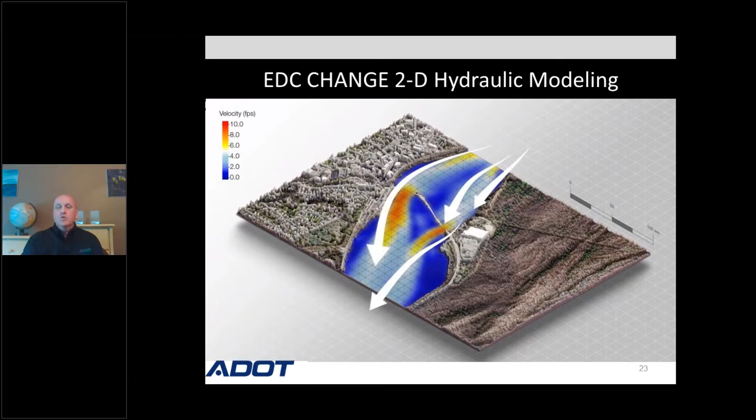And in this case, we're talking a little bit more about 2D hydraulic engineering, in particular SRH-2D, which Federal Highways is promoting. And for the last 3 years, Arizona has been a big proponent in attempting to adopt that. Concurrently with the USGS fact sheet from 2019, that same month that came out, all credit goes to Federal Highways Hydraulics, Scott Hogan and his group in providing a peer exchange for the Southwest states.

That really further introduced how we've developed these suite of tools with USGS, how they do. Now, everybody is geographically specific to the different types of tools and data sets that they need available. Again, these were developed to be much more Southwest, dry, flashy wash environment realities. So we really were appreciative of being able to introduce these things and see how they really start to integrate into the full hydraulics environment.

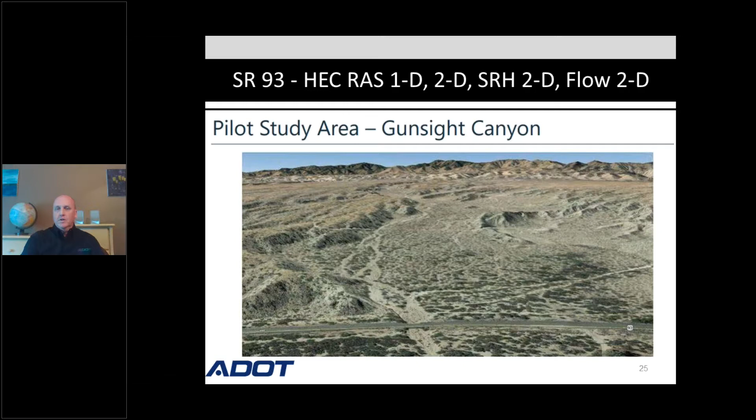And it's really one of the major pilots we undertook to look, as you can see in the title, at HEC-RAS 1D, 2D, SRH-2D, and FLO-2D. And then just the last couple of slides, I just wanted to give everybody a look at where we're at right now. All these tools continue to progress.

And I thought I would just very basically bullet the sequencing that we've gone through on one of our current projects. Now, watershed and reach modeling through a rapid deployment gauge and the continuous slope area process is integrated. Those multiple sensors that I mentioned are at this location that you can see in the upper right. You can see the San Pedro River is one of the major waterways in Arizona. It also has, to the middle right, that bump out area, Dragoon Wash. And so that's all to the downstream side of the bridge, okay?

So the sequencing is pretty straightforward. USGS does their hydrology analysis. Where we feel it's appropriate, we mobilize the sensors and the rapid deployment gauge is bolted onto the bridge, hopefully 2 years in advance. So we start to gather. Remember, it doesn't rain a lot in Arizona. So we're always hoping respectfully, without anybody endangering themselves, that we get some runoff. That allows us to process 2 years of true data.

And it really allows us to move from that very approximate FEMA/StreamStats data environment. If we get some runoff, we can move to a little bit more of a theoretical rating curve environment. And then if we get, which we have here, a couple of nice 11-foot peak flows out here, that gets us heading toward a much more fully calibrated reach rating curve.

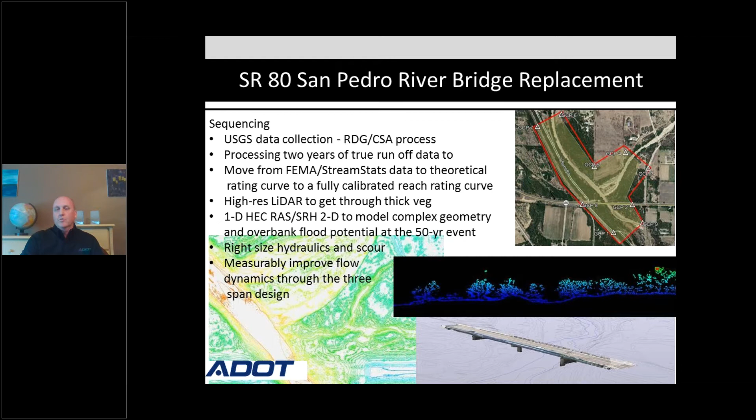And then the outputs, as we get better and better at this, are right-sizing hydraulics, and I don't want to lessen the importance of the scour. The holy grail is better understanding scour, especially out here in the Southwest. The SRH-2D tool, among other avenues, has really improved the way scour can be looked at, and that's a big push to advance the scour tools for us at ADOT, in particular on this project. And then the common sense output, measurably improved flow dynamics through this 3-span proposed design that you see at the bottom. Okay, last slide.

We don't really stop there. I always like to share one extra slide of what we're doing. Because we're 6 years into a lot of these data collection efforts, validating and doing the proof of concept for the different tools and seeing what the outputs are, getting the input from the internal ADOT folks, the decision makers, and also our external design engineering firms. We've gone a little bit further now, and we're continuing a pilot at this State Route 80 location of taking all the suite of information that we've gathered and starting to move to a probabilistic risk decision-making process for our bridge asset class.

So it is a pilot for us, and it specifically has an effort to look at live loading, extreme weather loading, climate-induced loading, and the data sets that we've been able to gather. And we really want to develop a baseline methodology. Remember, it's exploratory, a baseline understanding of how we might compute the probability of failure given those different life cycle realities. And again, the reason is we continue to want to move to a risk-based life cycle asset management effort.